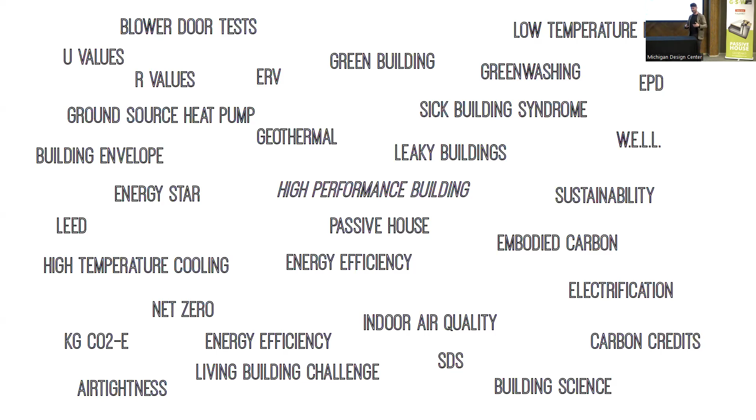And so when we bring outsiders in and don't explain what it is, you end up with a kind of impenetrable soup of acronyms and specialized phrases that are quite tough to get your head around. So what we're going to try and do today is begin to bring some order to all of this stuff so that you guys can have some insight into how it works. There are a handful of big container phrases, to describe what the thing is in totality.

Most of these words are quite specific things, but a few of them are big. So we asked ourselves, are we green building architects? My boss, the principal, his previous firm was the Green Design Studio, and he is absolutely adamant that green as a useful term in design died around 2008, that it had both got too trendy, but also too associated with slightly hippie-looking buildings to be useful anymore. He refuses to let us use it on any literature we put out there.

Sustainability is going through a slightly similar thing right now, where you probably noticed that it is used in almost every newspaper article at some point. Every product declares that it is in some way sustainable, reaching a moment where it's so widely used that it's kind of not useful anymore.

Another really popular one is building science. A lot of people I know describe themselves as building scientists. This is a special kind of nerd who deals with construction, and it is often used as a job title. People who will come and see what's wrong with your house if there is a smell that you can't get rid of. And for us, it's a little too specific because we're also designers, and I want to call myself a poet, and a building scientist and a poet, definitely not the same thing.

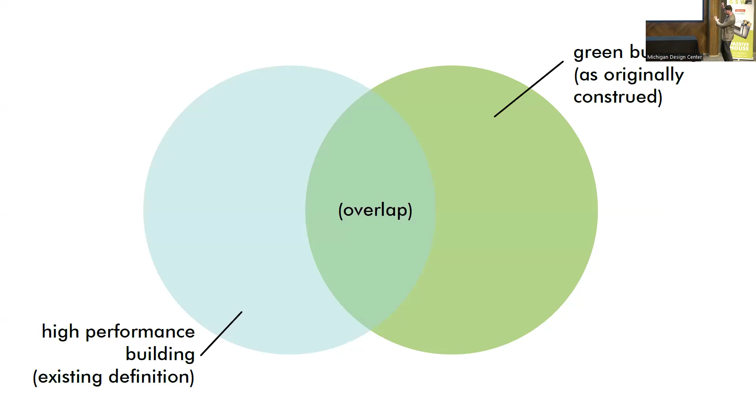And it's definitely different from that kind of sandal wearing, yurt construction, green building vibe. It's definitely not that. You know, it's something athletic and precision and possibly slightly illegal at times. And it was developed and became more formally used in the early 2000s.

So, okay, little guessing game now. Three people who might have been in the lead of the organization who developed the term high performance building. A, William McDonough, well-known green architect and author of the book Cradle to Cradle. B, Wolfgang Feist, founder of the Passive House Institute in Germany. Or C, Donald Rumsfeld, Secretary of Defense. Okay, who reckons it's A? B? Okay, B. C? No C's, shame.

So the phrase was actually developed as part of a DoD exercise in the early 2000s to standardize how their buildings were built, mostly pushed by the Army Corps of Engineers. I suspect Rummy didn't have much to do with it, but it became part of something that's still available, the Whole Building Design Guide, which is a fantastic resource. I apologize for the terrible low-res image. Best the government can give us these days, I guess.

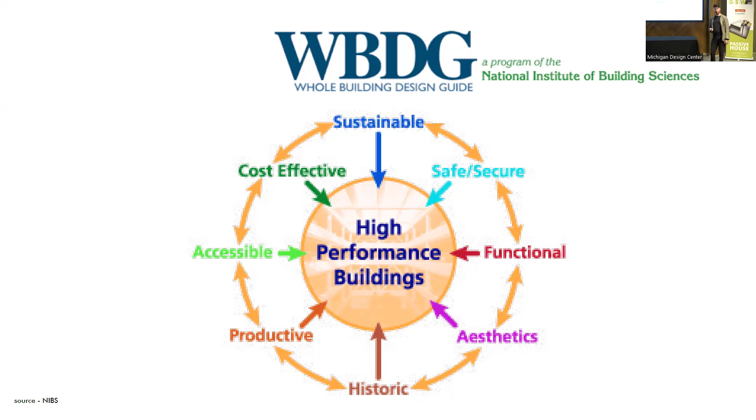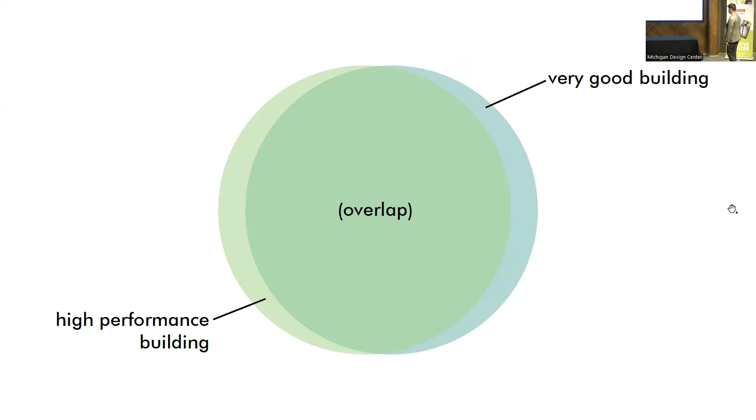We find that by the time we've used maybe two of these words, we've got more questions than we have answers. And so we've come up with our own slightly more straightforward, broad definition, which is that there's building really good buildings and there's high performance buildings, and they're basically the same thing. If it's a good idea and it makes your building better, it's probably something that is incorporated in high performance building. And so all of those ridiculous words that we saw in the soup at the beginning, we can start to organize into things that are about good and bad buildings.

There are things that are problems. We all know when the wind blows through your house and all of the heat is sucked out with it. We know when your house has water running down its walls or mold problems because there's a hole in the roof, that is a problem. We know when you find yourself getting real sick in one particular house, that there is something wrong with that

house. We all know too painfully what happens when the energy bill doubles year on year and your wages don't double to match. We know what happens when your kids start coughing in their bedrooms. And those are sort of broadly the biggest problems that high performance building is aiming to tackle. We also have some subsidiary problems that everybody kept bringing up, but fundamentally, hiding under all of it, we are trying to do something about that.

Then there's a whole series of measurement techniques that we've developed over the decades, some of which you'll be familiar with. If you go to Home Depot, it is required that insulation has its R value, which is the measurement of how much it stops heat flowing through it, written on the outside of it. So you go in, there's a big bag of fiberglass and it says R15 on it, and that means that whatever an R is, it's stopping that much, more is better.

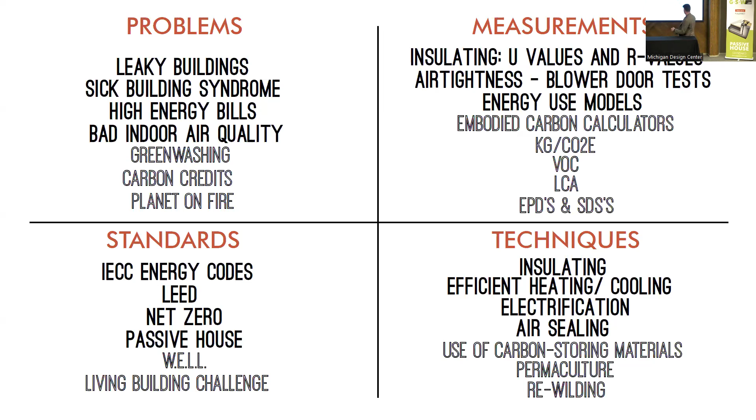We've been completely focused on energy efficiency. And that is, your house is built, how big are your heating bills, essentially, or cooling bills if you're in Florida. But increasingly, we're realizing that the construction methods and materials themselves are a huge, huge deal. I'll get onto that a little later.

We then have a set of standards that people can start to adhere to. Some people have to. The most familiar one will be the energy code, because it's part of the building codes here. And that sets levels of insulation and airtightness you have to have in your house. When you build a new home, you have to put a certain amount of insulation in the walls and in the ceilings. That is codified by the government and required in every state. Each state can adopt a different set of standards, but they all do have them.

And then there's a series of optional things that are becoming more and more popular. LEED was one of the first. This is leadership... I'm going to get it wrong, so I'm not going to say what it stands for. But it's a checklist where you get certification the more good stuff you add. Add some solar panels, get some points, keep adding good things, get to a gold standard, stick a little plaque on your wall.

Net zero is a target of making the energy use of the building match the energy the building produces for itself. So typically, solar panels is the obvious way to do it, where you're trying to use no more energy than you produce. When that gets balanced, you are at net zero energy. And that's a pretty popular standard. There are net zero homes in Michigan. There are also a couple of passive houses in Michigan.

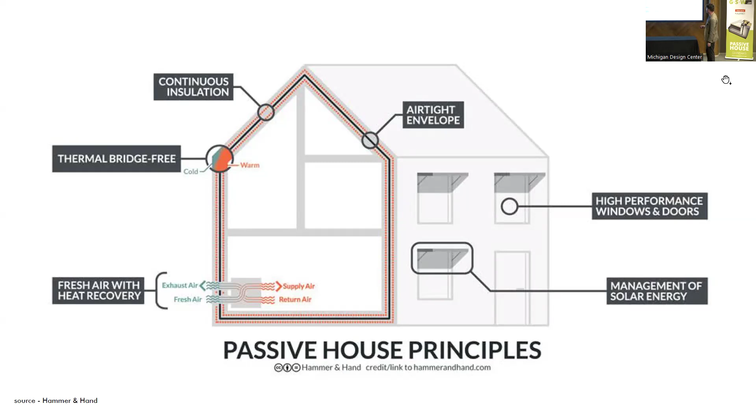And where are we? These houses can kind of look like anything. I've picked a nice modern house in the Pacific Northwest because, I'm not selling the architects particularly, but they have some great photos I'm going to show you later of some important bits. But when I worked in New York, I was working on neoclassical mansions for the fabulously wealthy who generally couldn't give a rat's bottom about climate change. But they really wanted nice, comfortable houses, and the techniques are almost identical.

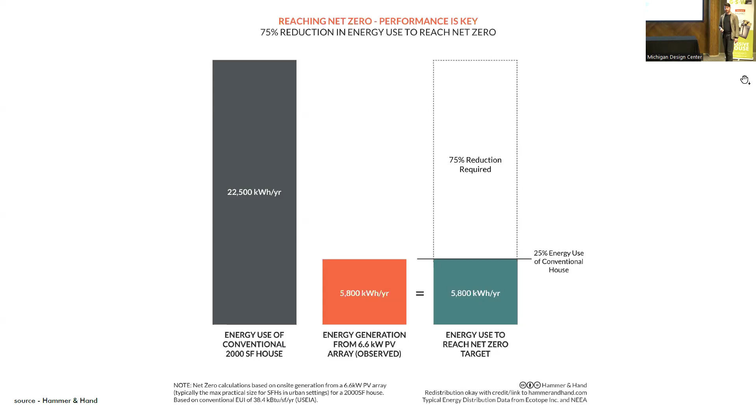Here's why Passive House is becoming the kind of bracket standard behind the scenes. Because if you want to reach net zero, this gray bar is how much energy a 2,000 square foot standard national house uses every year. This is how much solar power generation you might get off a third of its roof. And that's the difference between the two. So if you want to get to a point where you're not using more energy than you can create on your house without going crazy, you have to start cutting the energy that the building uses. And the best way to do that is cutting your heating and cooling, because that's the bulk of the power the building uses.

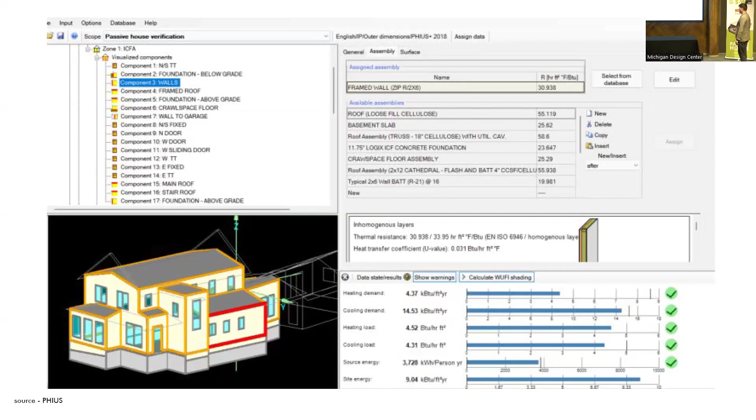And what our models tell us is all trending in the same direction. This is a little excerpt from the Michigan Energy Code. These are minimum requirements for new construction or major remodels. There is an amount, these are R values, an amount of insulation you have to have. R49 is about 16 inches of loose fill cellulose in your attic.

That's a minimum now. And you start to see the 20 is the R value you can have in a framed wall. It's bigger than 2x4. It's at least a 2x6. And the 13, which fits in a 2x4, has to come with 5, and that 5H is continuous, has to be unbroken by your structure. That's a Passive House thing, and it's in the Energy Code.

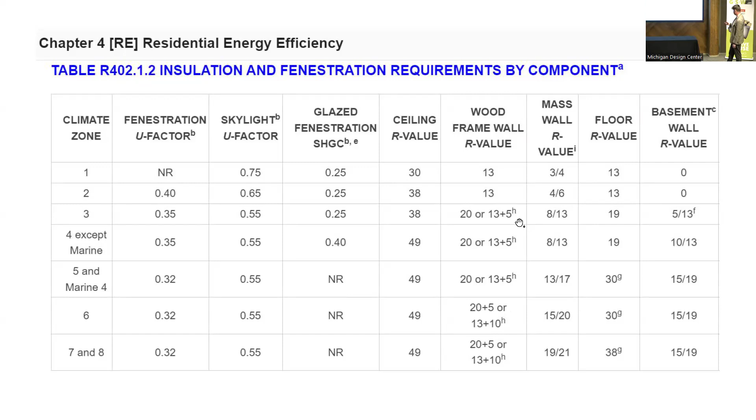And that Energy Code is from 2015. And we'll be moving on to a new one at some point, and because it's happening in Maine, these will start to get more stringent. But what does that mean? It's pretty simple stuff, mostly, you know.

Here is somebody wearing some really nice clothes for the job she seems to be doing, but blowing loose fill cellulose into their attic. We need to talk about the ducts, but in it goes, and that stuff's cheap and easy. Everyone knows how to do it. We make it here in Michigan.

It means nicer windows. Tenzia sells them. Window technology has moved on massively in Europe, and it hasn't moved on quite as far in America.

And I'm building a house here in Jackson, and the building officials were on my backside about my windows, and they came to my house specially to give me a little sheet about all of the requirements that they had to meet. I'm used to dealing with these things. I looked at them and I just couldn't believe that anyone is still selling things that performed as badly as the minimum requirements, but they were really fussy about it.

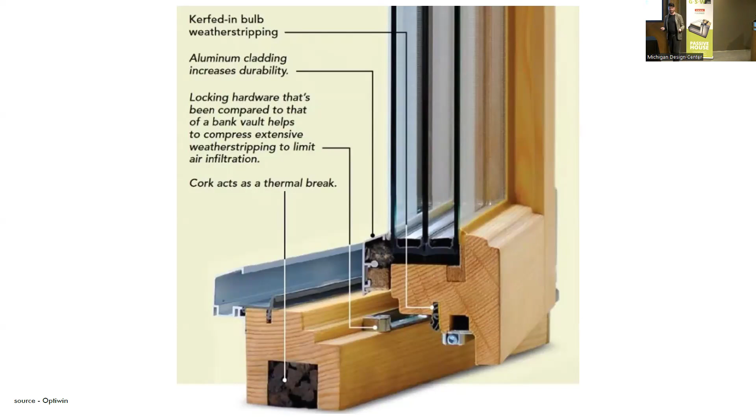So it means that somebody somewhere is selling lots of windows that don't even meet our minimum energy codes, which aren't that strict right now. Now, this thing exceeds the insulating requirements of the energy code by about 3 times. So who's making something worse? I don't get it.

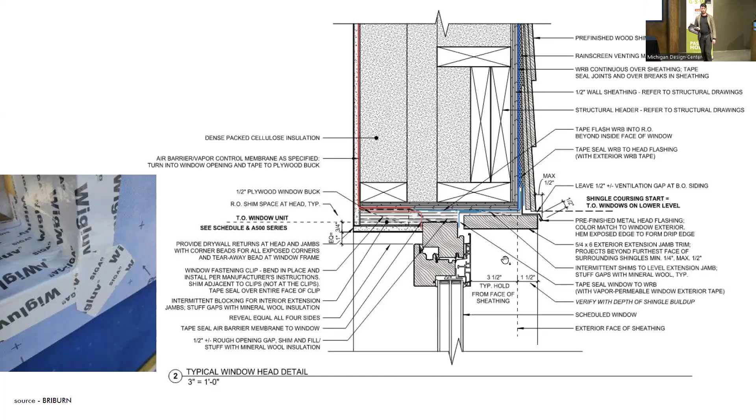And this is, I couldn't resist, a bit of product placement for SIGA, who are a Swiss manufacturer of these new high-performance membranes and tapes, and the tapes are incredible. I put this up because all of their installation photos feature this gentleman who wears a waistcoat while he works. My experience of it is more like this.

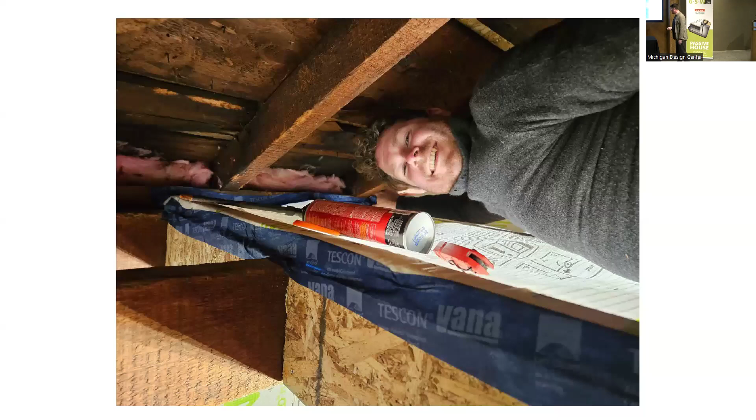But again, it's just sheets of stuff and tapes and bits of wood, and occasionally, when I really have to, a little spray foam thing.

And those two biggest things, the insulation and the air sealing, form the vast majority of all of the efforts that have been put in by the community that probably by now call themselves high-performance builders. But there's a new one.

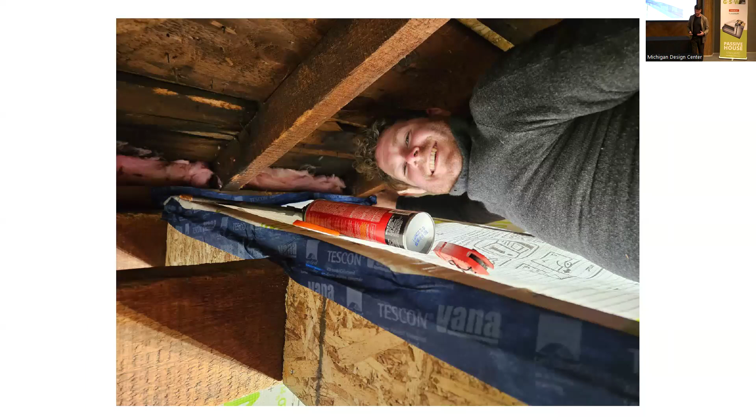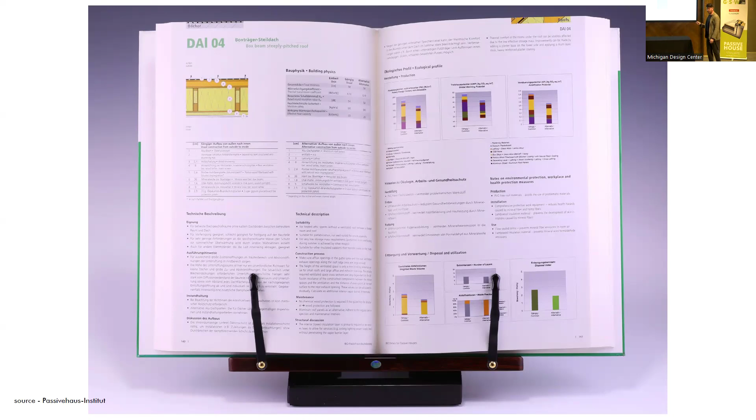But it is the hottest topic at the moment, to the point where at the Northeast Sustainable Energy Conference that I was at in Boston this year, it was featured in almost every talk, and it has become the conversation of the moment. Started at NESEA in 2019.

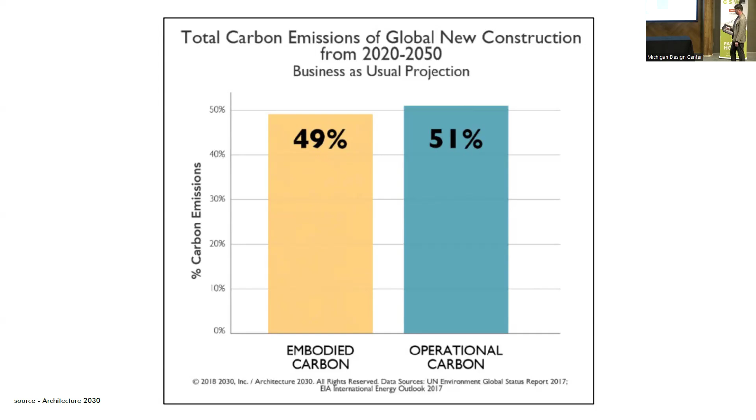The keynote presentation showed this chart, and everybody lost their ever-loving minds, because what we've been focused on, what science nerds are calling operational carbon, is basically the energy use of the house, but calculated as the equivalent amount of pollution going into the atmosphere. If that's how much over 30 years our buildings are putting into the atmosphere in their daily use, that was how much the construction materials of those buildings were putting in to make them happen in the first place. And if we had only been thinking about this, we've been ignoring half of the problem.

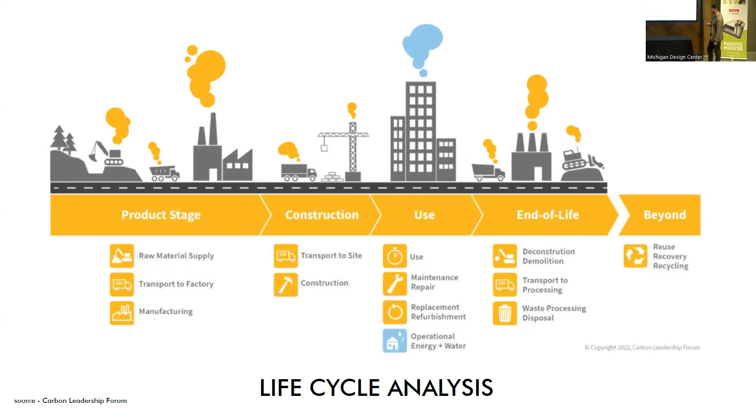And so what everyone's doing these days is life cycle analysis of all of their materials, which starts with how they're grown or mined, how they get to wherever they're processed, how they're processed, how they get to the site, how they're installed at the site, what happens when they die. And that thing we've been so focused on, that most of our clients think is what we do, saving, reducing, making more efficient the operation of the building, is a small part of a much bigger picture.

Why does it matter so much right now? Well, the planet does seem to be having some issues at the moment with the amount of carbon in the atmosphere, regardless of whether you think it's caused by human activity or not. In the construction industry, there's no doubt we're definitely doing that. It's about a quarter of global emissions from the construction industry, and the embodied energy in the building materials happens right at the beginning.

It's happening right now, and the use energy happens in small amounts over a long, long time. So in that first year of your house being built, almost all of the pollution you put in the atmosphere is in the materials. And it's all well and good saying we have an efficient building that over 50 years doesn't use much energy if in 50 years everything looks like those Australian wildfires from a few years ago.

So the new tool is an environmental product declaration. Hands up who has seen one of these before, heard about them. Good, you shouldn't. No one should look at these. They're impenetrable. It's pages and pages of this stuff. Now, what is the ozone depletion potential of AdvanTech floor sheathing measured in kilograms of CFC-11 equivalent on stages A1 to A3? 5.1e-7. What does that mean?

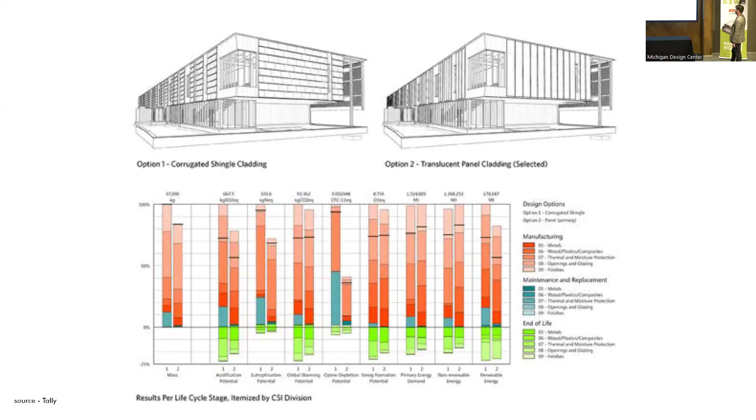Luckily, people are putting together tools that take this data and turn it into stuff you can use. The big kids in large commercial firms are making enormous, complicated models of their buildings in the computers and spitting out all kinds of data. This is from a program called Tally. But for us poor folks in the residential world who don't have whole teams of energy efficiency people, or who are just building or are just homeowners, there's a great new tool called BEAM that Builders for Climate Action have released for free.

It's basically a large spreadsheet, a big database of hundreds of building materials. You type in, well, I've got about 3,000 square feet of walls in my house. If I spray foamed it, how many kilograms of CO2 would I be putting in the atmosphere? And the answer is, whoa, tons. That's a lot. Which is why the spray foam industry has been changing its blowing agents. And now new spray foam, much, much less. But compared to nicer insulations, cellulose actually stores carbon dioxide because it would otherwise be rotting, or newspapers burning probably.

And Beam gives you this nice little breakdown of where all the bad stuff in your buildings is. And so this is really a thing for people who are doing big renovations and new buildings. But whenever we're asked, okay, well, what's the problem? Where does this stuff go? The answer is really, really clear.

This is a standard 2,000 square foot house built with 2x6 walls with a full basement, 2-story thing, 3-bedroom house maybe. It's all in the foundation. Concrete is by far the worst offender for just polluting everything. So we are trying to persuade our clients not to build basements, which you can imagine is a really interesting design challenge. But there are lots and lots of things that we can do just with really, really simple product choices.

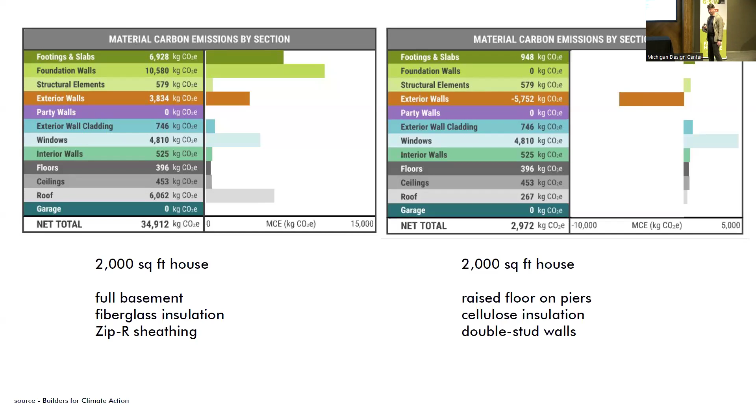Yes, question. R-values staying constant? One of the clever things about Beam is that it lets you decide, and it doesn't let you decide by thickness, you decide by R-value. So you're targeting a particular amount.

Cinder blocks, is that less carbon emissions than concrete? Great question. So the silly answer is you should download Beam and take a look.

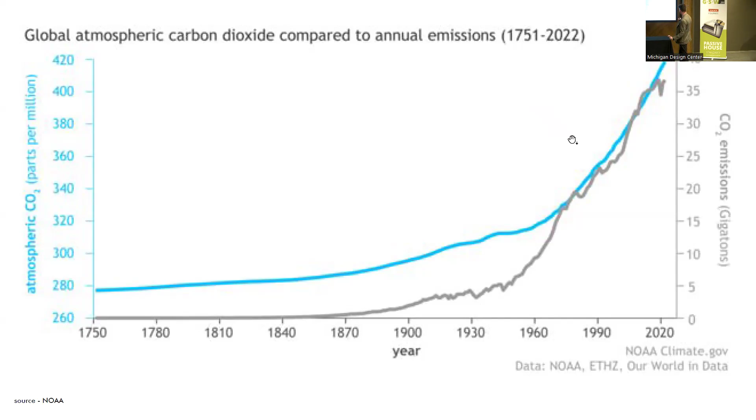Short answer, no, it's not better. Most concrete block requires just as much energy to make as poured concrete. They usually come out about a wash. Of course.

So what we're learning as we look through this is, to the surprise of absolutely nobody, that we're back to another really simple no-brainer situation, which is that materials that seem like they would be healthy and nice, like hemp fibers and recycled newspaper, are way better for you and for the planet than materials that are really stinky. So I know we've got some, sorry, before I move on. So this is the lesson.

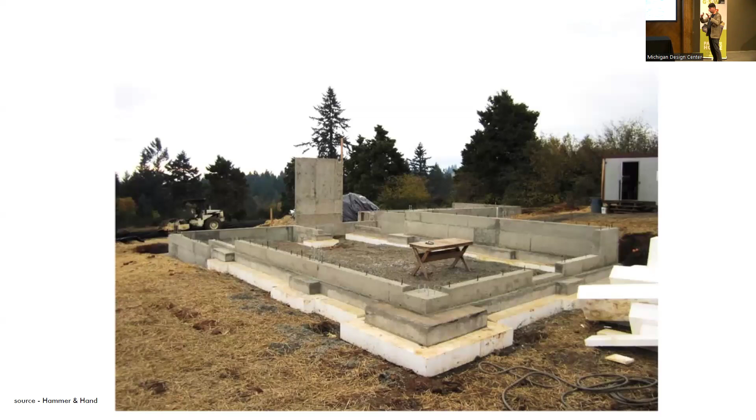This is that house we looked at the beginning with the big square boxes, nice big glass that I said we were going to look at again. This is its foundation. And this is what is making high performance designers cry around the country. This house is beautifully built. From a technical perspective, it is amazing. It is so well insulated. It is never going to leak. It is incredibly detailed, wonderful.

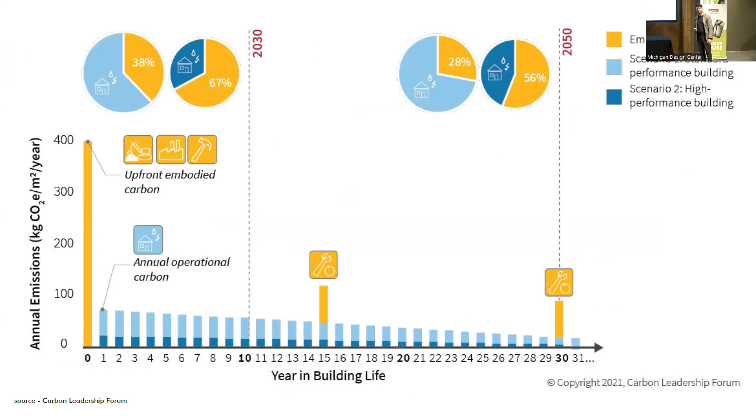But that was achieved with massive amounts of concrete, and it has an R60 basement slab that they achieved with, this is styrofoam. It's like that thick. And the amount of carbon that went into that, we go back to this graph, that went into that to get the really energy efficient lifetime use. That building may be paying that off for most of its lifetime. It may never break even on that energy use.

So I know we've got some interiors people. We're here, Michigan Design Center, mostly interiors stuff. This is where it gets interesting for you guys, where we're just beginning to get our toes wet. A lot of the materials that are really bad for the planet are definitely really bad for people too. There's an almost one-to-one relationship.

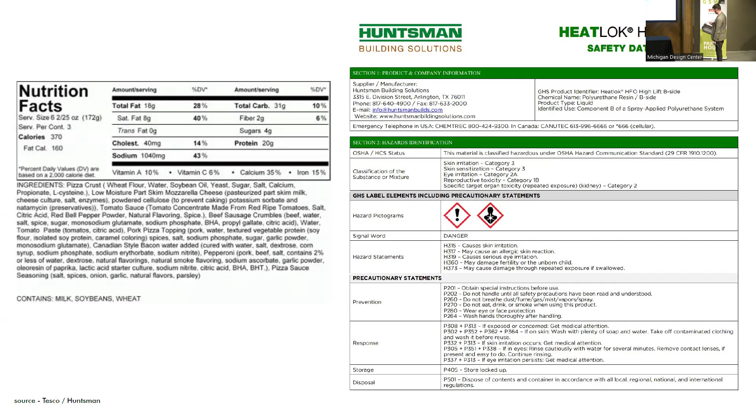And where there are red flags, say, why is this here? Because a lot of the time, it's not for the consumer. A lot of this stuff is not to make it taste nice or be good and healthy for you. It's because it keeps the sausage crumbles looking nice and juicy in the package, and so that it lasts longer in the package. So this stuff, every time we talk about it, is really, really critical.